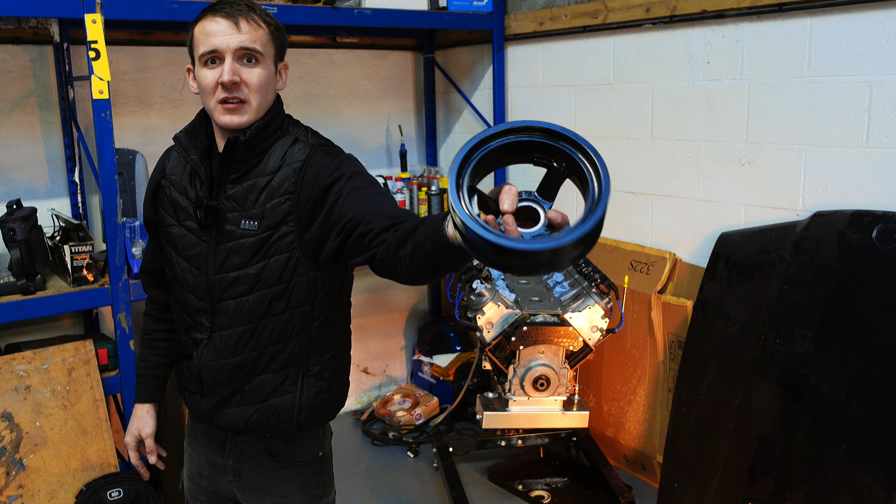So yeah, that's the alternator. I've already actually scanned the alternator, so I won't be doing that today. But what I do need to do is get the crank pulley on, which I have painted off camera. So I want to get that on, get the engine scanned, particularly this sort of area.

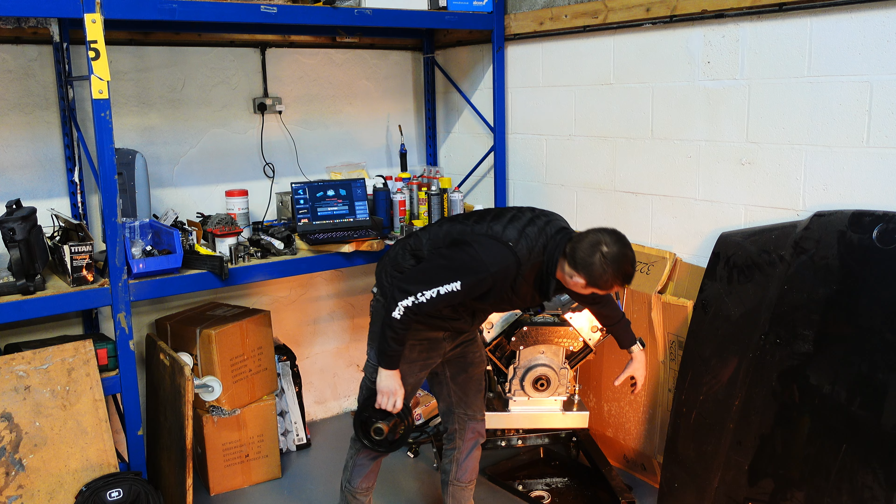My initial thought was to have the alternator here, but I think with the dipstick it's going to be a bit too tight. And there's no actual reason why I don't put it here. So yeah, let's get on with that. First job, get the pulley on.

I did have to order a tool. I was tempted to drag it on with the old bolt. I have got a new bolt, but I read online that you could potentially strip out the threads in the crank, and I didn't really fancy doing that. So I thought I'd buy a tool, which was, I don't know, 10 or 15 quid or something, which could potentially save me many monies. So yeah, sometimes it is best to have the right tools for the job.

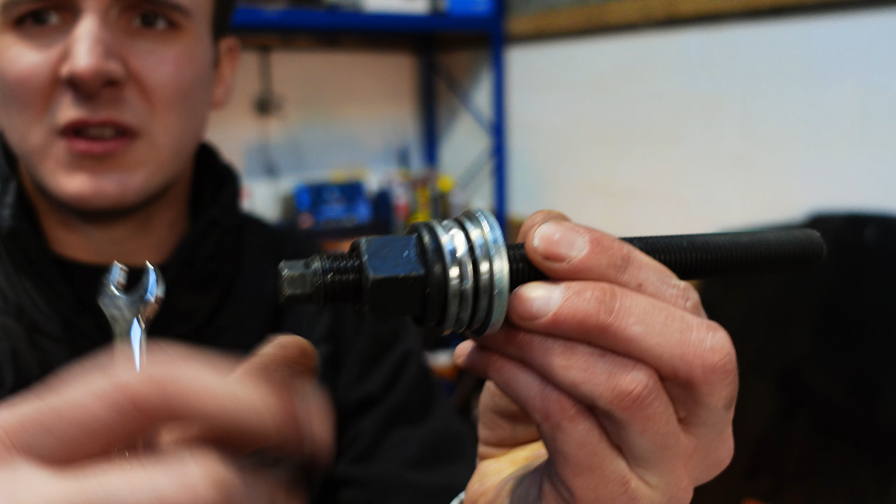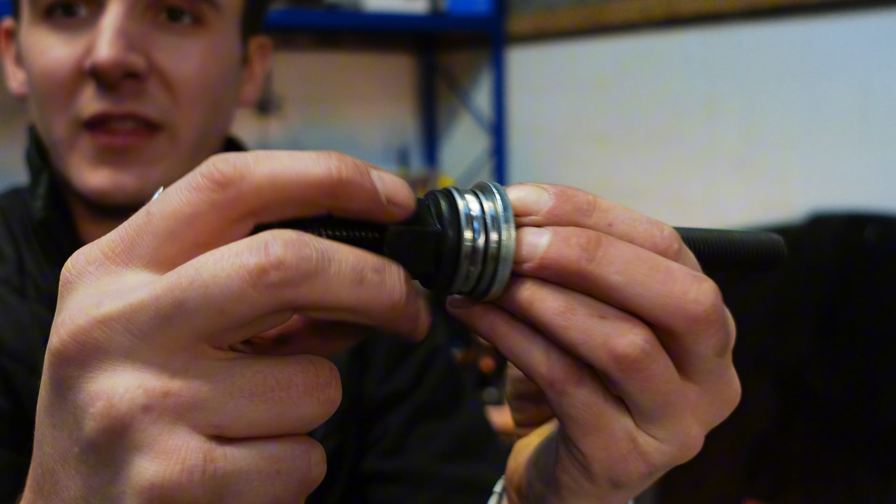So with this tool, it's just a case of threading that bar in. It's got a nut, as you can see, and a bearing. So when you're tightening it up, it allows the nut to spin easily. If I can get that actually in the camera, well done. So yeah, the bearing just allows it to spin, but the washer, the piece that's going to be sat against the crank pulley, doesn't spin.

The idea is to bottom this out, the actual rod out in the crank, and then once that's bottomed out, you then wind it in with the nut, and that will pull the crank pulley in nice and straight, and hopefully no damage to the crank.

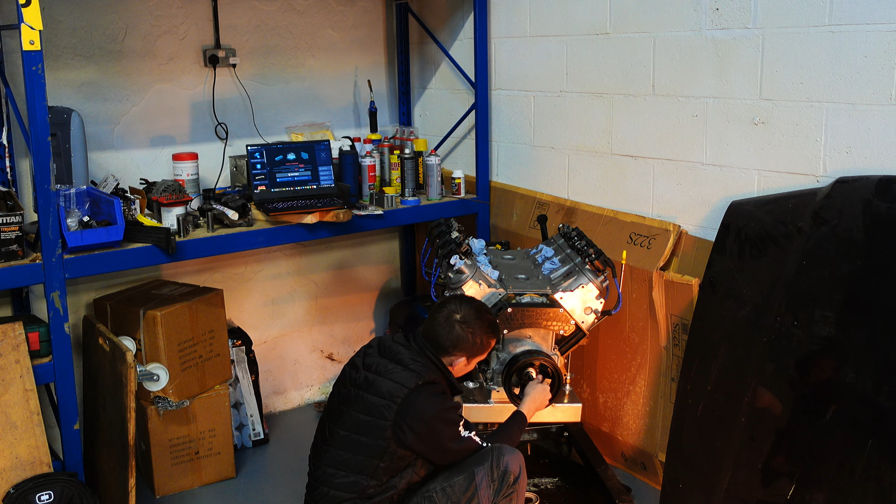Oh, that's what happens when you buy cheap tools. That bearing's just collapsed. Yeah, when I say collapsed, it's no longer really a bearing, to be honest. All the balls have shattered and all sorts. And you never want your balls to shatter. Never. You can see, I don't know if you can see all the balls falling on the floor.

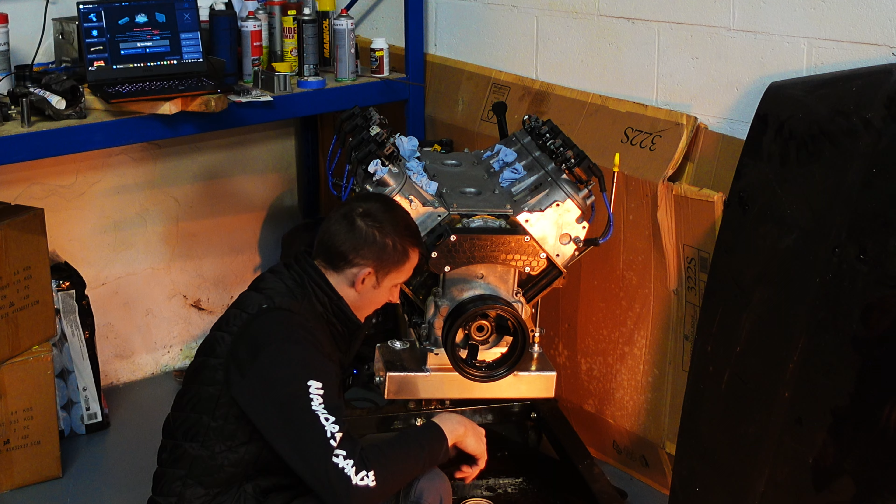So, I mean, it's most of the way on. I think what I'll do is drag it on the rest of the way with the old bolt. Turns out when you buy a cheap tool, they're only a one-use tool. Oops. But I think it's done the job, it's got it on most of the way. It only needs to go on another couple of mil, I think, like 4 or 5 mil. Where's the old bolt? Yeah, so I'm just going to use the old bolt, and then I'll go on with the new bolt in a bit. So you throw that on the floor if you were wondering.

It's definitely gone on more. So let's have a little look, see how she's sitting.

That seems to be fully seated. I've decided I'm not going to put the new bolt in yet, mainly because I've not brought a torque wrench with me. So what I'm going to do is my scanning, what I need to do now, with the pulley on and everything, and then go from there.

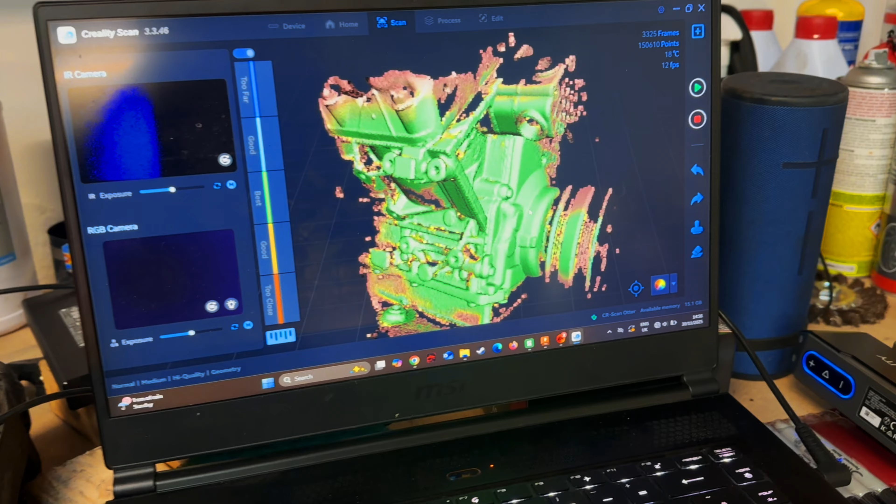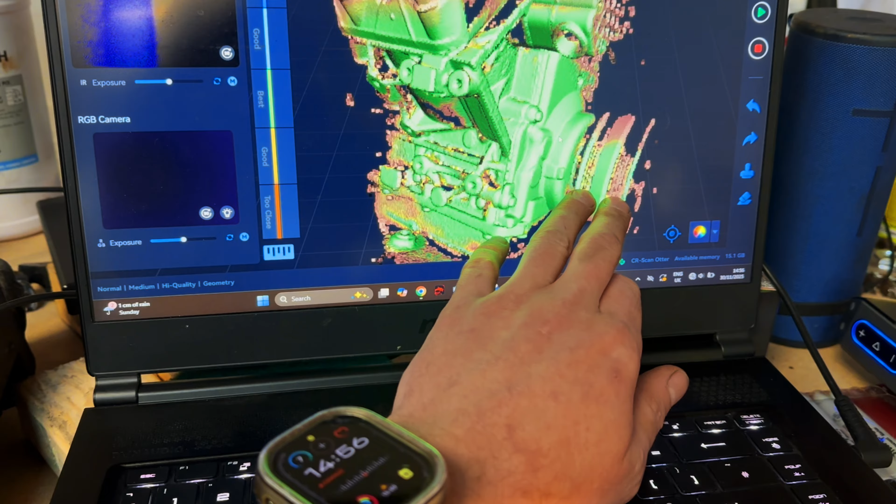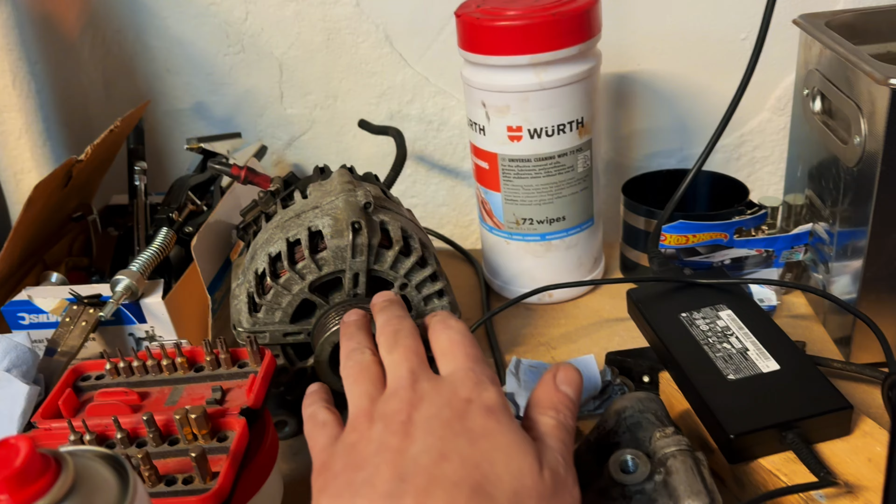So what I've got here, I think, is enough scan data. I've got my 4 points that I'd like to utilise as mounting points, and then I've also got the 2 bits on the pulley, which I know aren't in the best detail, but at least give me a position reference, which is what I'm after. I can use that as well as my scan with the alternator to align it all up, because I've also got the pulley on the scan data.

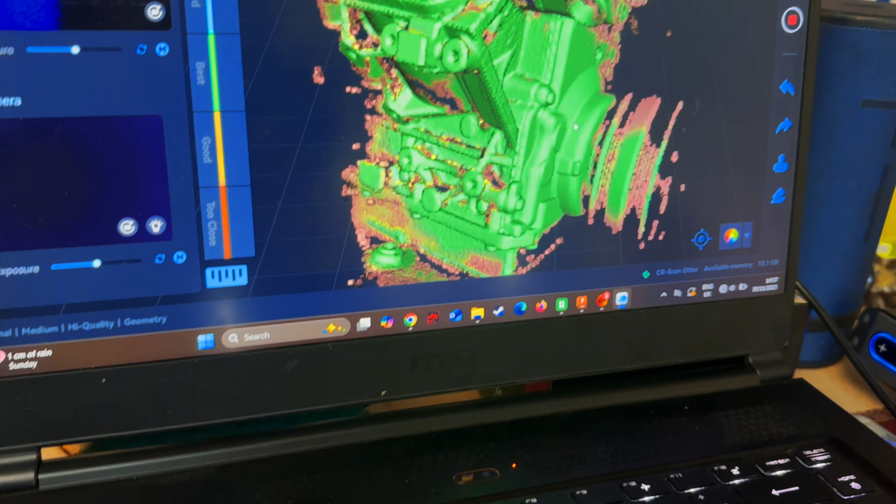I've done my scanning now, we're sorted with that. I'm going to hopefully be able to design something up. But what I did notice as I was moving all my stuff from my garage to the workshop is this, what was the bracket that held the AC pump, and it has a tensioner. Don't know if you can see that.

So what I'm thinking is I want to quickly whip that off, give it a quick clean, take that home so I can maybe use it to design, incorporate a tensioner into my bracket, because I was initially going to do something tensioned with a rod or similar, but I think I'd rather the alternator be bolted on fixed and have a tensioner of some sort.

Yeah, maybe we'll go with something like this. I'll take this off and use it as a baseline. I can always change it - it's the beauty of designing stuff on CAD. Can do a few iterations now.

The last thing I just want to check out is, so I've now bought a 3D printer. It's not in here, it's at home. I've been messing about with it a lot. I've got the Bambu Lab P1S, it was on a Black Friday deal. Bought it, been using it quite a lot. I'm really impressed with it so far.

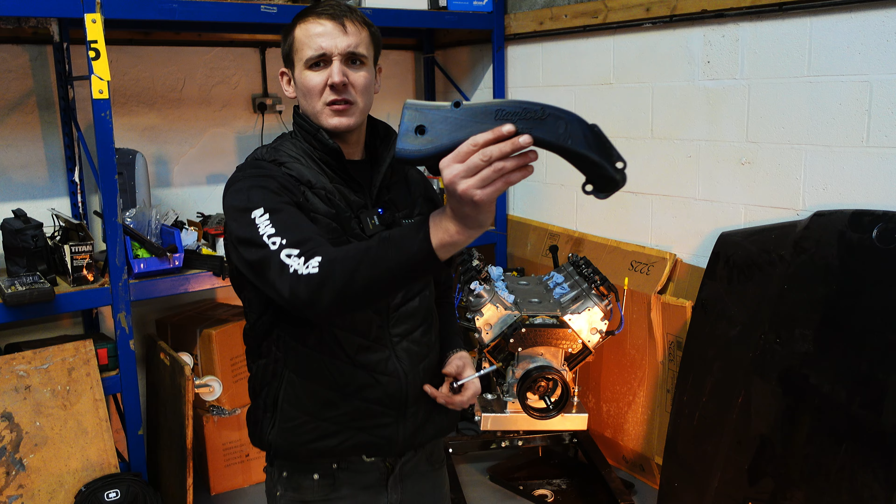I've done quite a lot of prints, printed some of my designs off, but I've only brought one with me today, that I just wanted to test fit and make sure my geometry works. What I've brought is an updated version of my water manifold.

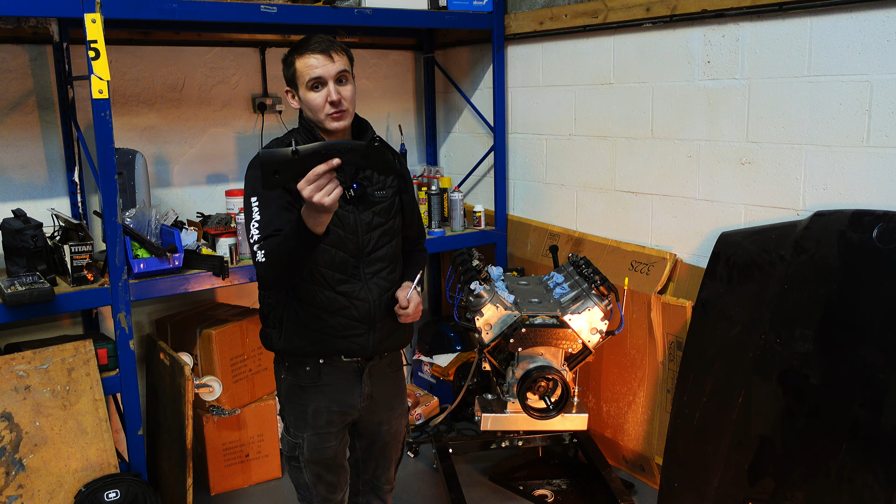Since I've bought this 3D printer, I've been doing a lot of research on materials, and I've found some that can hold around 200 degrees, which should work for having the water manifold 3D printed. I think I'm going to try it.

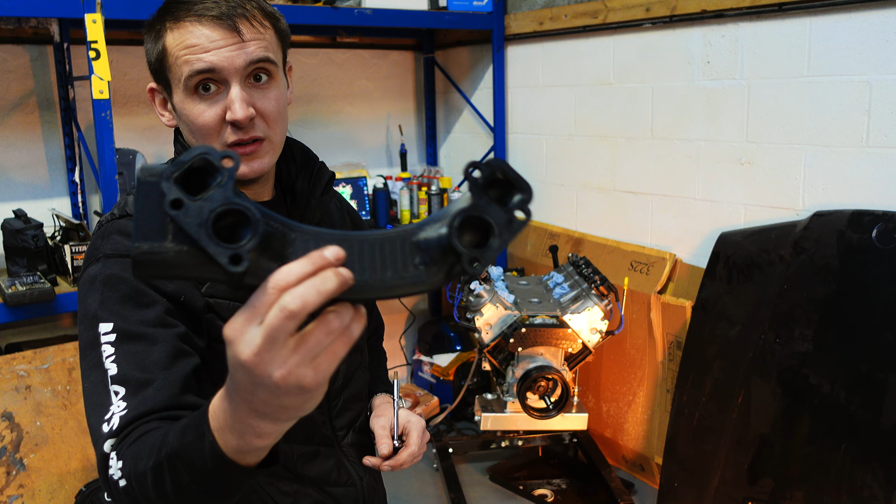So I've 3D printed, this is just printed out of ABS, the first initial prototype of one that's going to be 3D printed. As you can see, I've put O-ring grooves in it. It's printed out of ABS, and so far it's printed amazing actually - one of the best prints I've managed to do. There are a few layer line issues, but I'm still getting to grips with the settings, so it's bound to happen.

If you've watched the previous video, you'll know I already have a prototype for a water manifold. This one was designed to be CNC'd. I got it 3D printed as a test print, and I've made a few slight iterations on it because the bolt holes were slightly out.

Since buying this 3D printer, I've been doing quite a lot of research on materials. I was under the impression that the only high temperature material was PEEK, which is very expensive and needs a very expensive machine to print it. But there's also carbon fibre nylons or something, I'll throw them up on screen, that should hold about 200 degrees. I'm going to give it a go and see if it holds the temperature and the water pressure, which realistically isn't that high anyway, 1.6 bar or something. If it's going higher than that, we've probably got a bigger issue on our hands anyway.

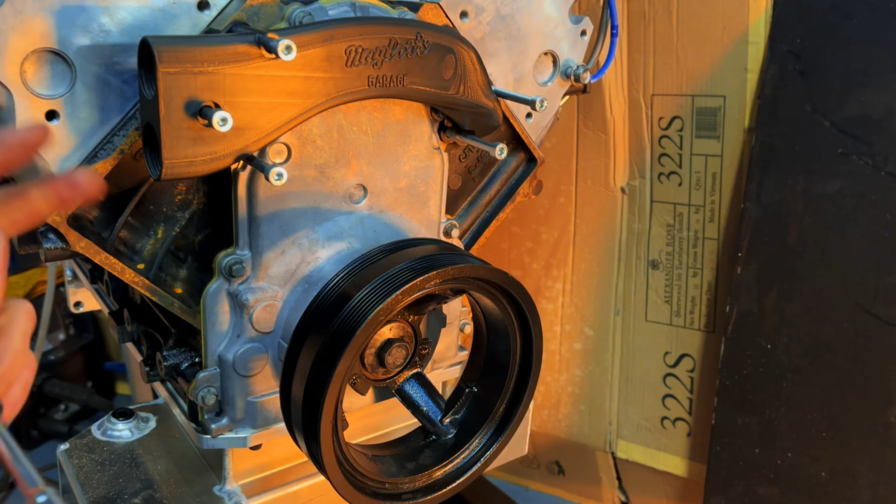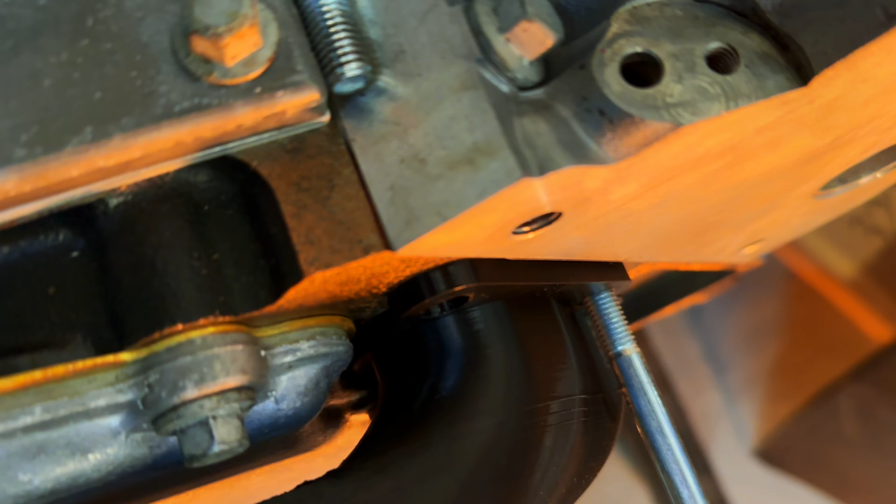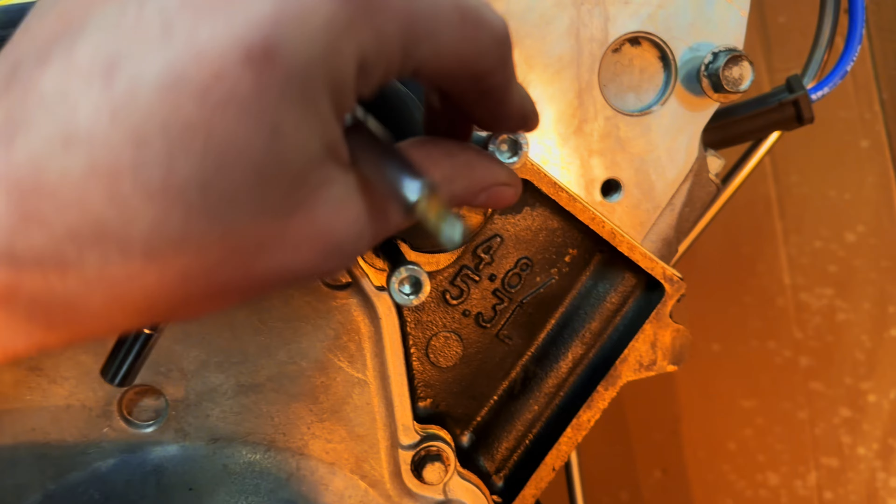So it's bolted up loosely, and I think it looks pretty cool. Something a bit different, no contacting issues, nice bit of room around it. The only issue I have at the minute is my bolt holes are just slightly out. These two are under tension, this one's alright. I just need to move this one up a touch and that one out a touch, which isn't too much of an issue. But I think that is a little bit of an improvement from the other one.

So it's been a week, and I've used my scan data to design my version 1 of the alternator bracket. These 3 holes, 2 here and 1 here, will mount the bracket to the engine block, and those 2 holes are to actually mount the alternator.

To start with, I've just had it bolted directly to the block. There's no adjustment on the alternator, and for now there's no tensioner. I did say I'm going to build a tensioner into it, I've since cleaned it up, but I've not designed anything for it to work as of yet. I want to do a quick test fit with this, make sure the alternator fits to it, make sure this fits to the block, and then I'll look at building the tensioner in, if that's even possible.

So yeah, without further ado, let's give that a little go.

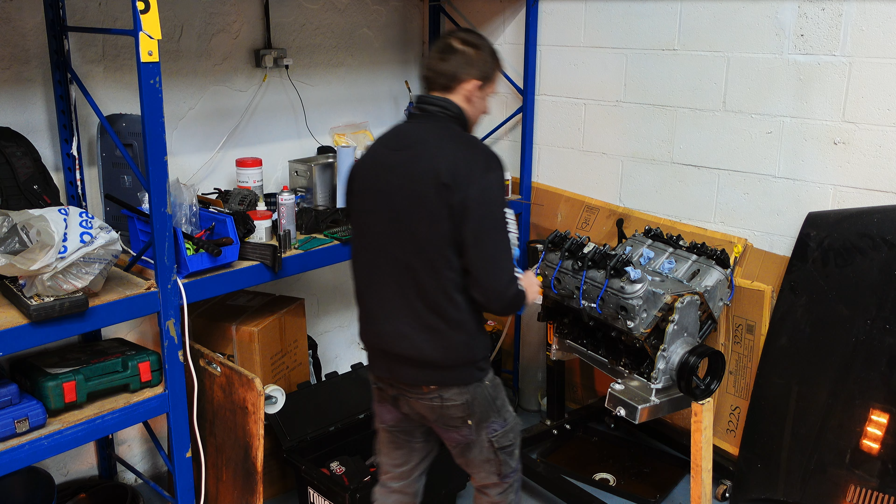The first thing I've done, I've made the bolt holes the wrong size, so I'm going to drill them out a little bit so they fit. Right, I've now drilled them out - not the prettiest, but I just need to open them out to 10 or 10.5 mil. So let's get that bolted in.

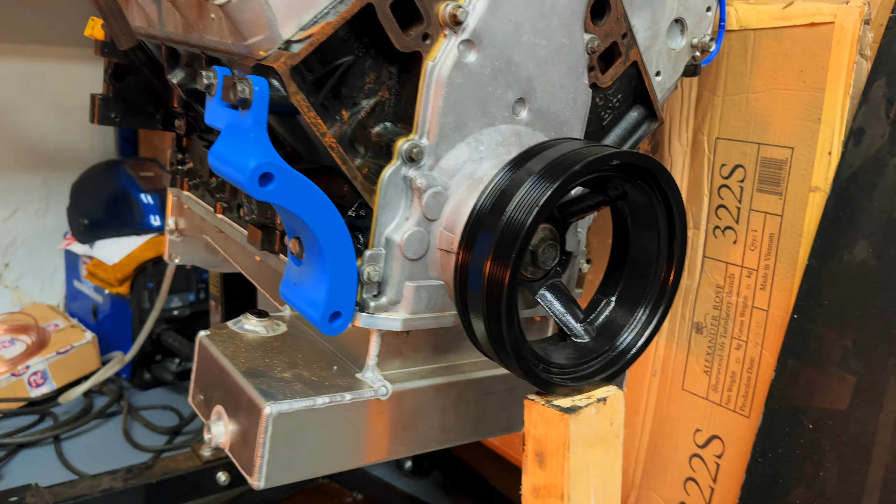As you can see, that fits up to the block, lovely. You might notice that I haven't used this hole - my thinking was I'm going to try it like this for now and see if it requires an additional bolt hole. And if it does, then obviously I'll stretch it out to this point.

But I'm hoping I can get away with it with just these 3 mounting holes, especially once it's made out of either aluminium or steel. I don't think it'll be an issue that it's only these 3 mounting bolts. But yeah, I suppose we'll find out, won't we. It sort of fits around the block, nice and flat around the hole. I'm pretty happy with that.

So the next thing is the alternator. The alternator bracket is now installed. I did think I had bought the alternator bolts when I bought the alternator, I thought I'd put them in with it, but I don't seem to be able to find them. So I'll just have to pick some more up when I get there.

The idea is that I use the original alternator bolts, but we'll fit her up and see how we get on, see if I can do it with some smaller bolts. It just needs a tiny little tickle with a belt sander, and I'm going to do it on the back edge because the front edge is more important for my fitment.

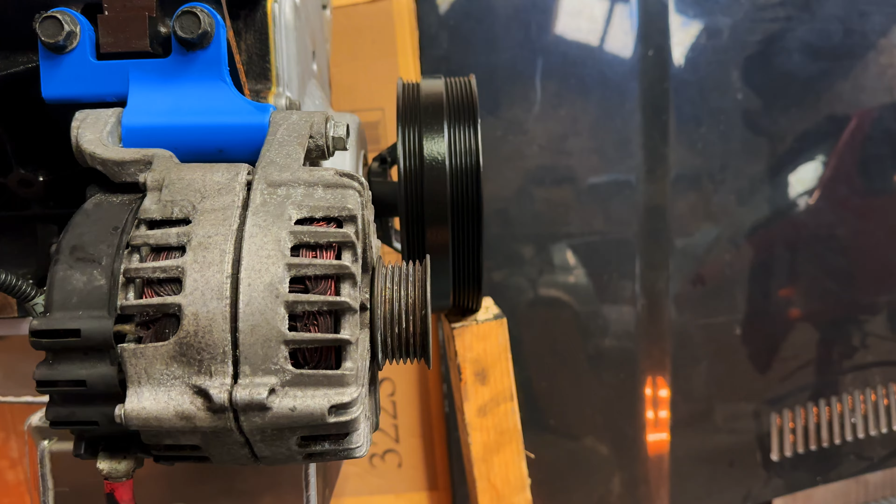And as you can see, I line those ribs up as best as I can, and I'm pretty sure that's going to be close enough alignment wise.

Well, I suppose we'll find out. If it starts spitting a load of belts off, we'll know I need to adjust it, but I'm pretty sure that's right. I lined it all up in the CAD software, and everyone knows it must fit in CAD. If it fits in CAD, it fits in real life. That's like the rule, apparently.

But yeah, I'm pretty happy with that. Sits nice and low. The only thing, before I go too far printing a load and getting one made, I just want to make sure that doesn't contact the chassis leg or anything like that. But I just think that is going to look much tidier, instead of having one slung up here somewhere. It's all up on that side, keeps it down low, keeps it tidy.

And like I said, I think I'm only going to be running one belt on this, literally the alternator belt. So I'll have the tensioner, I'll see how I want to tension it anyway. I've got a bit of figuring out on that side of things, but this sort of proves that the alternator bracket works, apart from a few little tweaks I've got to do.

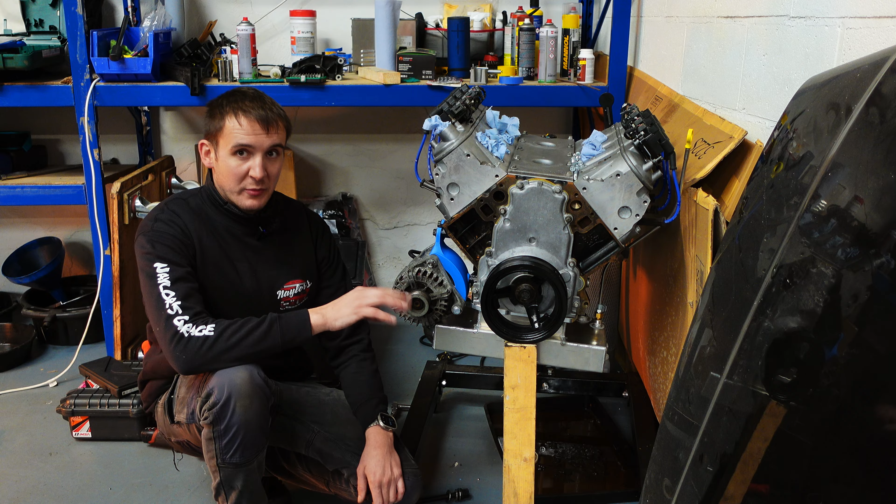So I'm hoping there'll be a video with this actually sitting in the engine bay soon. Obviously I still don't have a gearbox, but blah blah blah, I'm going to go on about it again. If this does end up contacting the chassis rails when I test fit it, I do seem to have a bit of movement. I can probably go 10 mil inwards, and I can probably go a little bit higher. So there is a bit of movement in that, which is quite nice.

But yeah, really happy with that, especially since I scanned it, I've designed it, and I've printed the test piece, and it all seems to line up nicely.

So like I say, if you enjoyed this little video, it's a bit of an itty bitty video about me 3D printing a bracket. It's not the final version, but I just kind of wanted to show you the beauty of a 3D printer, in the fact that within a week that was printed - I printed it on Monday night, and I did the scan on Sunday, I printed it Monday, so I could have fitted it Tuesday, it's just I've not got down to the workshop. And that's the beauty of 3D printing and 3D scanning, the fact that you can prototype these things and make these things on more of a hobbyist level now, where stuff like this used to only be done in industry. So it's quite nice that we can do this sort of stuff.